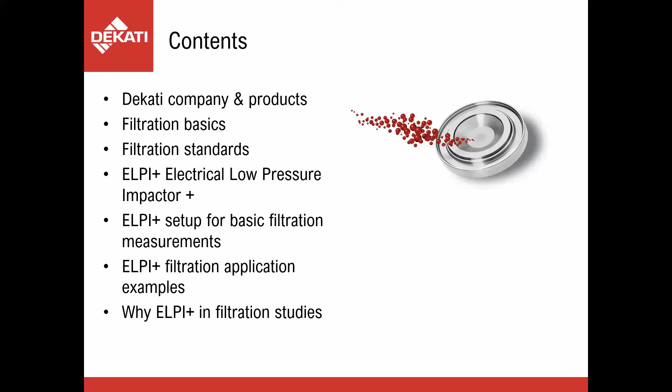But first, briefly about the company. We are about 25 years old company from the Tampere area. We are a spin-off company from Tampere University of Technology, Aerosol Physics Lab, and throughout the company's time we have been focused on fine particle measurement instruments - the development, manufacturing, and sales of those instruments. Our real core competence is in real-time fine particle size distribution and concentration measurements, and in sample conditioning technologies.

We are located in Kangasala in Finland, and we export almost 95% of our sales through our distribution network. Just last year, we got the accreditation for ISO 9001, so we have a quality certificate.

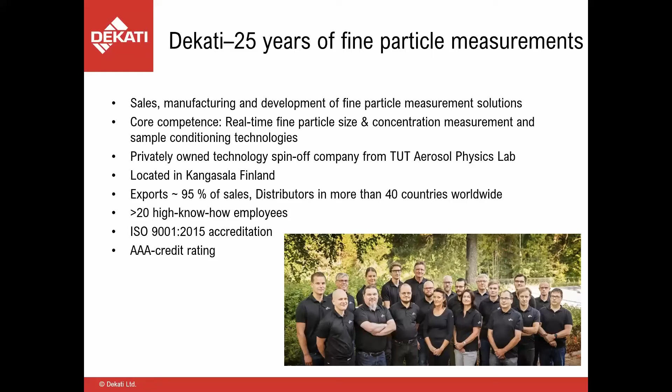If we take a look at our product line briefly, we have a range of real-time instruments, namely the ELPI Plus, or the electrical low pressure impactor plus product family, which include the high temperature and high resolution ELPI instruments. We'll be mainly talking about these instruments today because they are the most relevant for filter measurements.

We have a couple of so-called real-time, more handheld instruments for more occupational health type work, for example. And we have a range of just gravimetric collection impactors for non-real-time collection of gravimetric samples with a little bit different cut points and flow rates.

In addition to these, we have a wide range of sample conditioning devices, where our newest instrument is the eDiluter Pro instrument. These instruments are what we use when we want to measure from typically a combustion source, where there's a high temperature or high concentration of aerosol. We use these devices to dilute the aerosol down so we can then measure it with our measurement devices. But as said, today we'll focus on the electrical low pressure impactor product family in this presentation.

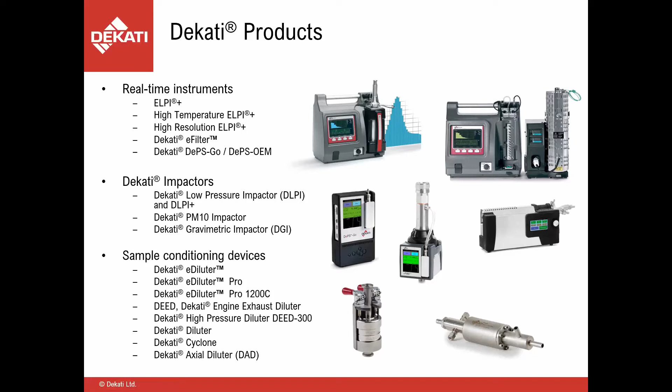We have quite a wide range of applications where our instruments are used. Of course, today we will be talking about filtration research, but our instruments are used in a wide range of other applications, including indoor-outdoor air quality, combustion optimization, nuclear safety studies, different automotive applications, including brake, tire wear, exhaust measurements, blow-by measurements, and so forth. And of course, occupational health measurements and general aerosol research, such as electronic nicotine delivery systems, bioaerosol generation, and just generation of aerosols. So there's quite a wide field, but today we'll focus on the filtration research.

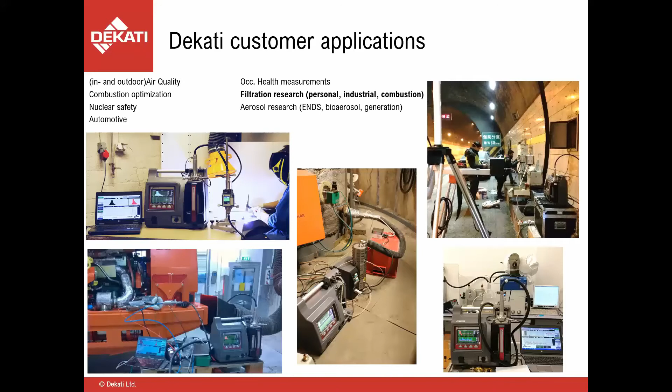So if we talk about the filtration basics first, of course, what filtration is: removal of particles from gas flow, or what we'll be covering today. And the quality of the filter is governed by two major points. One is, of course, the filtration efficiency - how many of the particles that enter into the filter penetrate the filter and come out through the other side.

And of course, the pressure drop of the filter. So in an ideal world, an ideal filter would be such that it would have zero penetration of particles and have no pressure drop at all. So those are the qualities that are aimed at in an ideal filter or filtration system.

There are quite a few different filter types. Of course, fiber filters like glass fiber filter or quartz fiber filter. These are most commonly known to us, of course, in our field in aerosol sampling, just pulling so-called filter samples and collecting the aerosol mass on the fiber filters.

There are membrane filters like cellulose membranes, or for example, Nuclepore membranes that can be used for both gas or liquid filtration, and tend to be very, very effective, and are used, for example, in HEPA capsules. These are, of course, also used quite frequently in aerosol sampling and creation of gas flows with very low particulate concentrations.

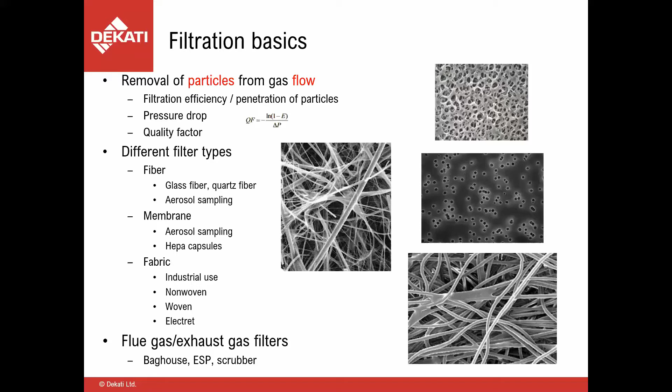So, in terms of filtration basics, filtration is affected by multiple mechanisms. There's interception, where when a particle approaches a fiber in the filter, the flow path may run so that it simply comes into contact with the fiber, and when it comes into contact, it's generally collected from the gas flow.

There's impaction, specifically for larger particles. So when a gas comes towards a fiber in a filter, the particle cannot follow the gas flow lines and instead impacts onto the filter surface or the fiber surface.

Then there's, of course, diffusion, where for smaller particles, a lot smaller than the particles that impact, their flow path is affected by collisions with individual gas molecules, and their flow path is irregular. They just by chance may come into contact with the fibers and get collected in that way.

And of course, for a gas flow, it spends some time within the filter itself, and during that time, for very large particles, there's also the effect of gravitational settling within the filter itself, and by that means getting collected out of the gas flow.

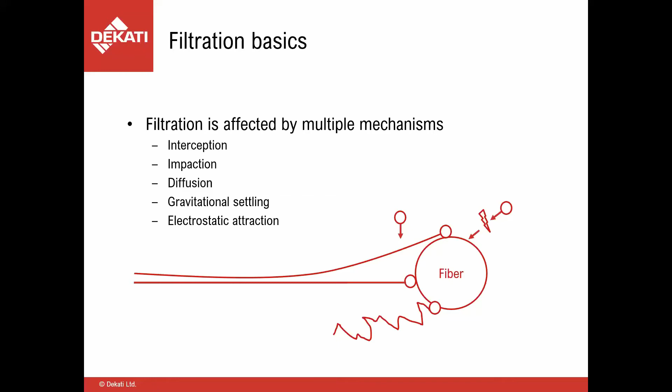And when we put all of these together, I trust most of you have seen this picture. When these different mechanisms are put together, what happens is that the larger particles are collected via sedimentation, impaction, and interception, and the smaller particles are collected by diffusion.

So what this causes is that when we put all of the particle sizes here on the graph, we have typically the most penetrating particle size through any filter around 100 to 300 nanometers, because they are the least affected by any of these forces. They start not to be so much affected by diffusion and are not yet affected by interception and impaction.

One thing to note here is that electrical effects are not taken into account in this graph, and what the electrical effects can cause is that the most penetrating particle size is not anymore in the range of 100 to 300 nanometers. We'll take a look at a few of those examples also later on.

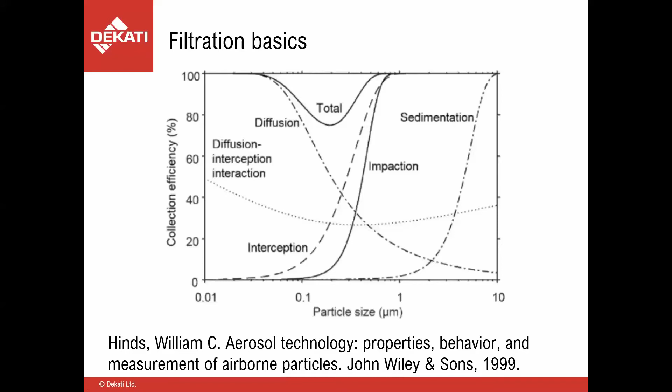Now, if we talk about filtration standards in general, there are many standardization and guideline bodies like ISO, CEN, ASTM, VDI that have standards for different types of filters and for different classifications of filters. Generally speaking, there's a range of challenge aerosols that are used, not in all of the standards, but a standard usually specifies one or a few of these challenge aerosols. Most typically used are potassium chloride, so-called dust, which can be, for example, dolomite dust, oil droplets, or sodium chloride.

And the most common measurement devices within the standards - the standards say exactly which measurement device or technology you should use. Most typically they are either optical particle spectrometers or photometers that are used in the standards to determine the filtration efficiency.

Now, the benefit of these devices is the very wide dynamic range, which is of course needed since the challenge aerosol concentration before the filter is high, and if the filter is working properly, the concentration after the filter is fairly low. So a wide dynamic range is needed.

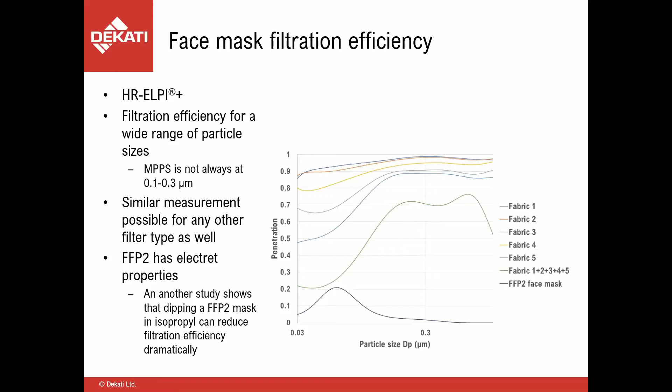I want to share another result, which was more of a troubling result during 2020 measurements. This is another measurement of a 3M FFP2 mask that fulfills the requirements of the regulation. And then there was one marked both N95 and FFP2 - a Chinese made mask which had a curious performance where very quickly during loading, the filtration efficiency started to shift.

Most other filters, especially the FFP2 filter, keep the same filtration efficiency, at least for minutes, while you're loading it - it doesn't seem to change in use. But for this face mask, I could see immediately when I started to challenge it with the challenge aerosol that the penetration started to change.

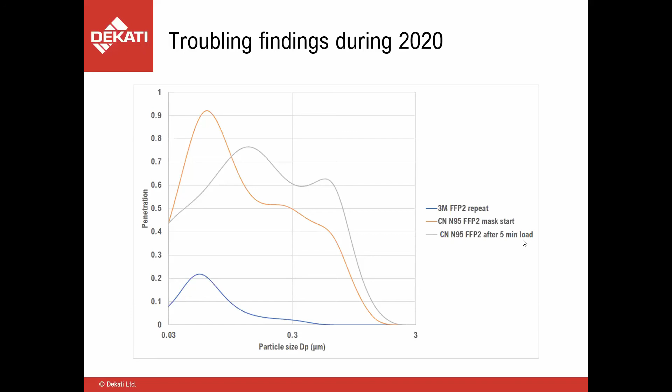We have another question about the generation of the particles in the setup. Let me see if I can get that open. Here we go. So the question is about generating the DEHS particles and controlling parameters such as concentration, size, and stability. That's a very good and important question.

I was using a Topas generator, from the German company Topas. They have a portable aerosol generator that's quite nice, easy and simple to use, and doesn't need an air source. So I used that as the aerosol source.

Stability is of course very important because if you have any drift, that's going to directly affect your filter test results. The concentration can be adjusted, for example, by using a dilution bridge or another type of diluter, or another way would be to simply add clean air to the system and allow an exhaust where the unused sample is exhausted. But I found, at least for my quick measurements, the dilution bridge was very simple and easy to put together.

The size of the generated aerosol - of course you can use different sources. This was just a nebulizer basically, but you can use evaporator condenser generators to generate smaller aerosols, or use different pre-cuts, for example, to eliminate some of the larger sizes if you don't want those, or if you want to go really into selecting a single particle size, use a DMA if you want to measure with monodispersed particle sizes.

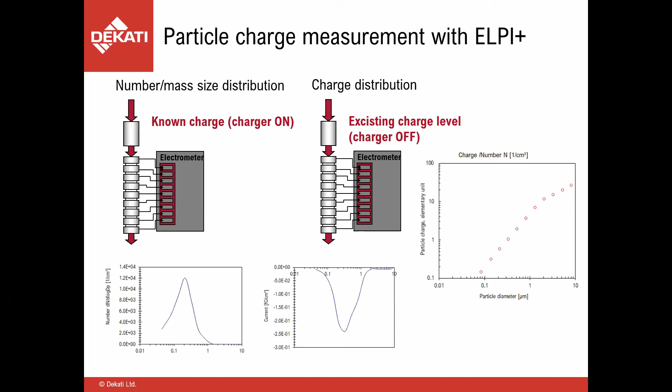This information can be used for a couple of things. For example, to measure the charge level of your challenge aerosol - it would be preferable that your challenge aerosol is neutral. So with the ELPI, with the charger off, you get very little or no signal.

Unless the purpose is specifically to study the effect of a charged aerosol on the filtration efficiency, because it will have an effect. If your aerosol is charged, it's usually collected more effectively by the filter.

The other thing you can do with this charge measurement is measure the charging efficiency of another charger.

As I said, I'll come briefly to electrostatic precipitators in this presentation, but an ESP works so that it charges the aerosol and tries to collect all the particles from the gas flow. But some of the particles come out of the electrostatic precipitator, and those particles usually carry a charge. So with the ELPI, for ESPs or any filtration system that uses aerosol charging, we can measure how effective the charging mechanism inside the filter is, separate from the collection efficiency of the filter that uses charging.

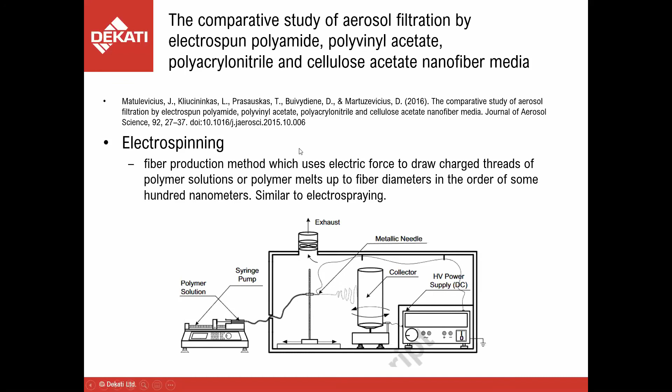With this method, in this study - you can see the reference here - a very large number of different filter materials were generated.

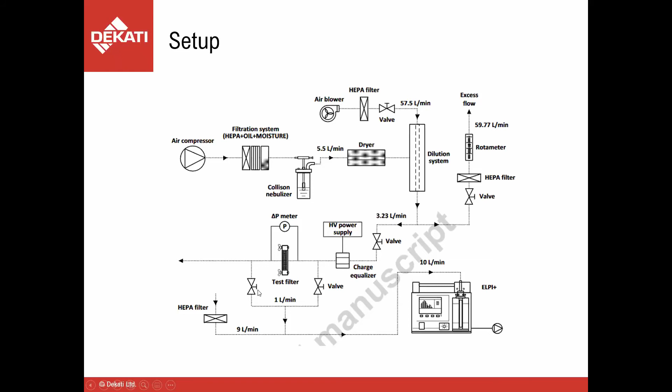Then there's a charge equalizer. As I said, if the generated aerosol has a charge, that affects the collection efficiency on the filter. So the aerosol was neutralized here, and then we had the test filter and measurements before and after the filter with the ELPI Plus. Here are some of the results - as you can see, fairly high filtration efficiencies with some of the materials.

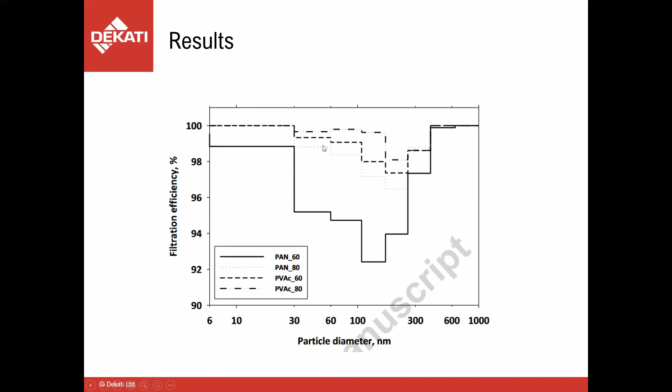As you can see, the ELPI can determine fairly low changes in filtration efficiency. But the study was very comprehensive, with a wide number of filters and different combinations of filters measured.

Very interesting results, seeing of course the pressure drop is directly related to filtration efficiency, which is expected. So with a lower pressure drop, you're going to get less filtration.

But this ratio varies with material, of course. So the idea is to find those filtration materials where you have the lowest pressure drop with the highest filtration efficiency.

Very interestingly as well, the most penetrating particle size varies with material. It of course varies also with flow rate and other factors, but it's also material dependent.

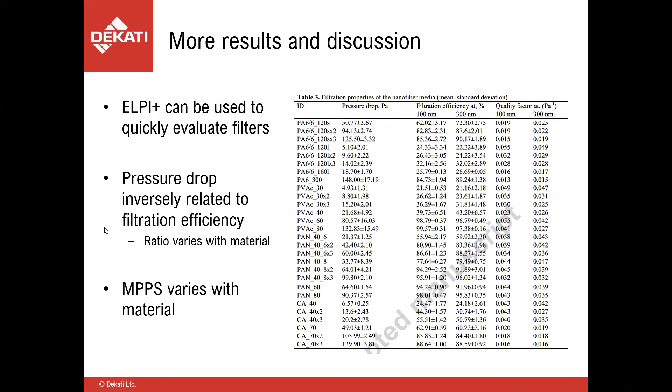We'll move on to the next example. In this article, what they did was make Electret air filters, which we discussed before in this presentation. The idea was to check the effect of adding titanium oxide to melt-blown filter materials, done with different electric field intensities during the weaving process itself.

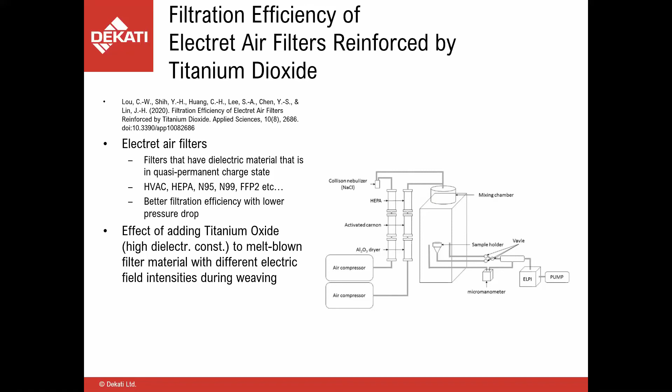And here are the results. The results are shown here with 1, 2, 3, and 4 weight percent of the titanium dioxide, woven at different electric field intensities: 1.5, 2.0, and 2.5 kilovolts.

What we can see here is that the 3 weight percent and the highest weaving voltage used gives the best filtration efficiency. There is strangely high penetration for large particles, which I think may be related to - it's not stated in these slides - but the filter had very low pressure drop, which is of course good for the filter.

It looks to me at least that the filter collection efficiency with sedimentation, impaction, and interception was fairly low before a sufficient electric field was used in the weaving process. So the electrical effects became strong enough to increase the collection efficiency of the filter.

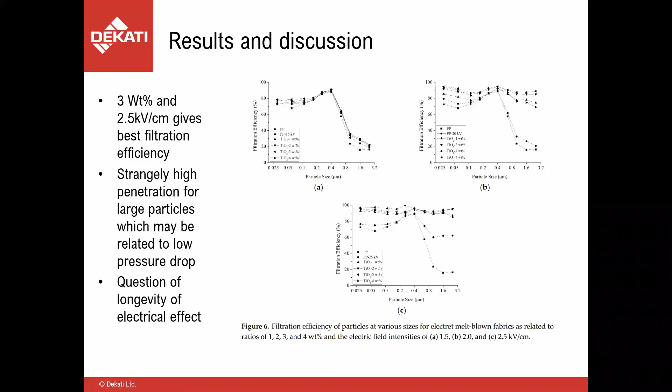Then the last example I have is from the nuclear safety side. Metal cutting, which is a widely used process in nuclear power plant decommissioning, produces, as one could expect, a wide size range of aerosols. Typically HEPA filters are used to protect workers, but how does filtration efficiency change over time?

This is of course very, very important in the sense that in nuclear power plant decommissioning, the risk is that the metal being cut actually releases radioactive material during the cutting process.

This next quote is from the article itself. It's fairly long, but I'm going to go through it because it highlights some of the things I've been trying to highlight myself in this presentation. It states that several studies have been conducted for evaluating factors affecting filter efficiency. However, most studies have been conducted using conventional aerosol generators, and aerosols that occur during metal cutting have not been addressed significantly. In addition, many studies have not fully considered the distribution of particle sizes for the efficiency of filters, although it's significant to understand the fraction of aerosols smaller than 0.1 microns for reducing internal radiation dose.

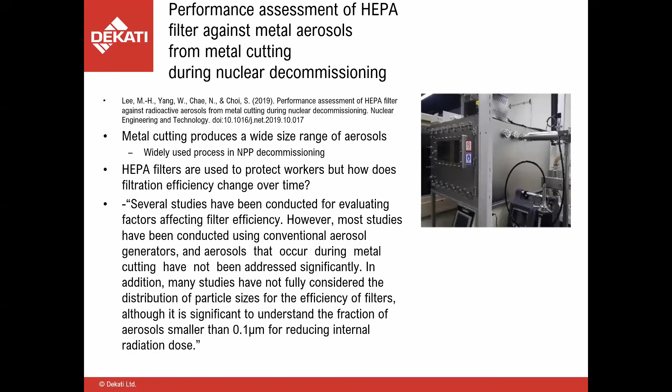Quite interestingly, what they found was that the filtration efficiency for this case drops as the filter is reused. So the filtration time - 1, 5, 10, 15, 20 - these are not minutes, these are actual cutting events.

So this is the first sort of cutting event, then it's after 5 times of use, 10, 15, and 20. And what we see here is consistently with increased use of the same filter, the efficiency drops from close to 100% down to about 93% after 20 times of use, for roughly the 1 to 2 micron size range.

So typically we expect filter efficiency to go up as it's getting loaded with aerosol. But in this case, it's dropping, and this is maybe due to the change in the electric properties of the filter, if the aerosol that is produced during the metal cutting is actually charged itself. So it might neutralize some of the electret properties, or something else is happening. Anyway, the filtration efficiency drops with repeated uses of the HEPA filter.

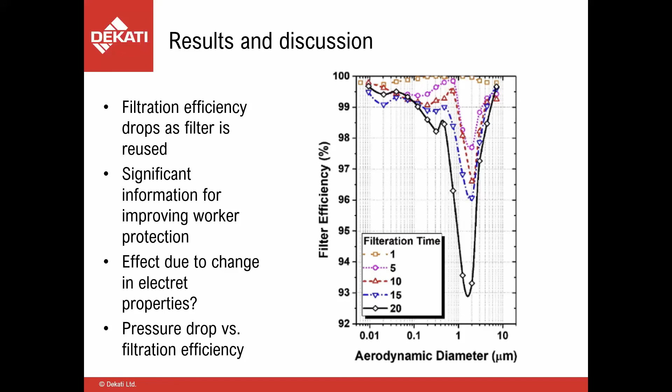So these are my conclusions now, and then we'll take a look at the rest of the questions. First of all, what we went through: the efficiency of filtration is dependent on multiple factors: filter material, flow through the filter, loading, humidity, and the longevity of the electret material or its electrical properties.

And the standard measurement methods, while they are very good when you want to just compare one filter material to another, and to make sure you have reproducible results, they do not really provide sufficient information to characterize filter performance in all real-life conditions.

So then, why use the ELPI Plus for filtration measurements? Of course, the dynamic range that I talked about, with the raw signals that we measure, we can measure up to 99.9975% filtration efficiency with that current ratio from 10 femtoamps to 400,000 femtoamps.

We have a wide size range, all the way down to 6 nanometers. So in the case that the most penetrating particle size is below 0.1 microns, we have no problem measuring that. Of course, we have real-time measurements, so you can see the effect of filter loading on filtration efficiency and see that size-wise effect as well.

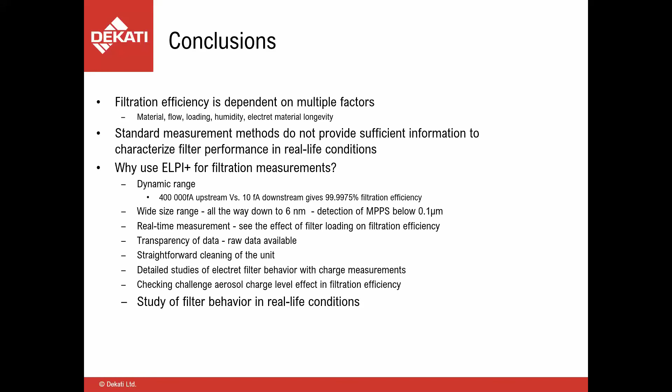Does the frequency of cleaning required for the ELPI Plus correspond to a particular mass loading on the impactor plates? Yeah, so roughly, if we talk about analysis plates, and then the sintered plates, which are used as default, it depends a little bit on the particle material itself, but roughly with the analysis plates, you could collect about 1 milligram per stage. And with the sintered collection plates, maybe 30 to 50 times the amount that you would collect on the analysis plates, so 30 to 50 milligrams of material per plate.

Let's see. We have a question: does the corona charger degrade with time due to particle deposition on electrodes?

In order to keep the corona charger stable, what we do is keep the charging current stable. So the current is always 1 microamp, which means we have roughly the same amount of ions always in the space where the aerosol passes through the ion plume. Of course, over time, some particles will collect on the charger walls and cause a little bit of an insulative layer. But as we keep the current stable, the voltage automatically increases to keep that current at 1 microamp. So there's the same amount of ions and we get the same charging efficiency for the aerosol.

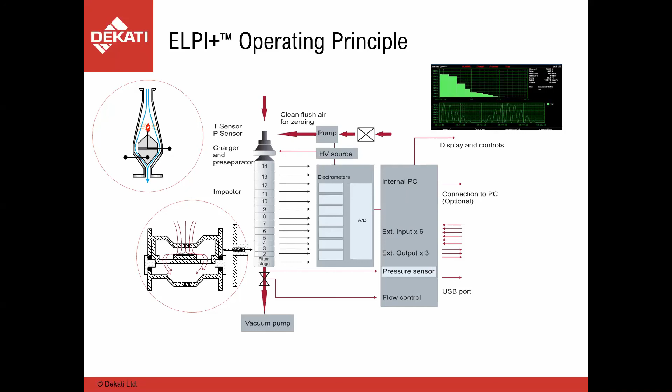Let's see, I don't see any more at the moment. We have a couple of other questions I missed earlier on. There's a question on the maximum resolution of the instrument. The high resolution ELPI has 500 channels within the size range from 6 nanometers up to 10 microns. We have done studies on this - it's of course not the same size resolution as with a DMA or an SMPS, but the ELPI Plus has the best real-time instrument for this size range and resolution.

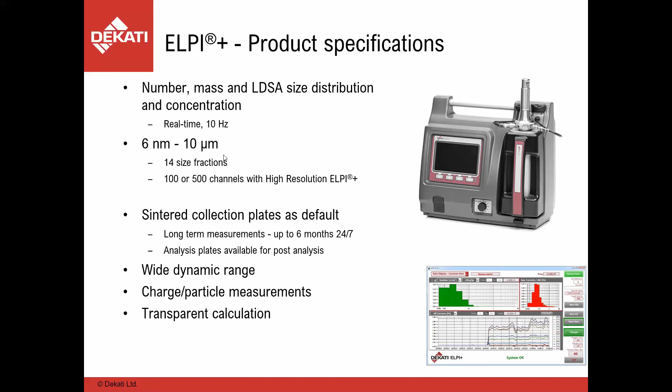We have a question on application examples of measurements made with the instrument on HEPA and ULPA filters. I don't have those at the moment. This is something I'm planning to do myself in the office once I get back, for the HEPA capsules, because I do know that we can measure the filtration efficiency - as I showed you in the setup, when we have the dilution bridge, we do see concentration coming past the HEPA filter. So there are measurable concentrations after the HEPA capsule. I'm planning to do that in the future.

Let's see, I missed one. We had a question on dust capacity protocols, but there was a connection problem. I believe there are some loading protocols in some of the standards, but I can't recall them off the top of my head at this time. This is a very important question though, in the sense that certain aerosols are used in the standards, but in real life, if the aerosol contains a lot of nanoparticles, it might load up or clog the filter much more quickly than if the loading aerosol only consists of coarse particles. So it's definitely an important field of study.